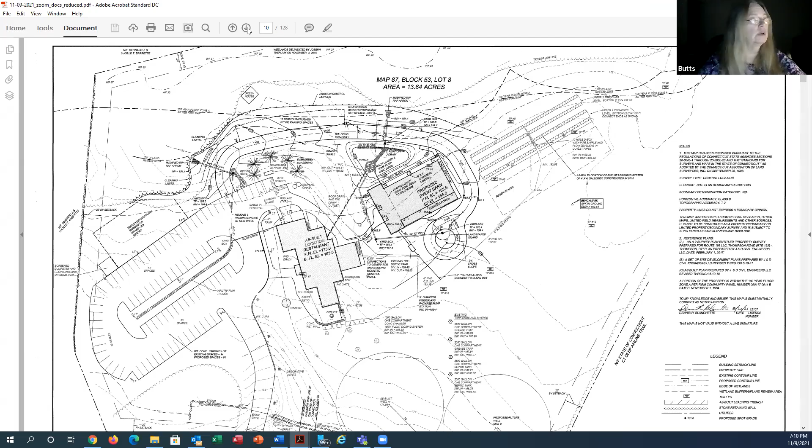Thank you, let's move on to the next item. It's SUB 21027, Inn Acquisition Associates LLC, 286 Thompson Hill Road, Assessors Map 102, Block 40, Lot 2, two-lot subdivision for conceptual approval, stamped received on 9/7/21. Let me just move to that.

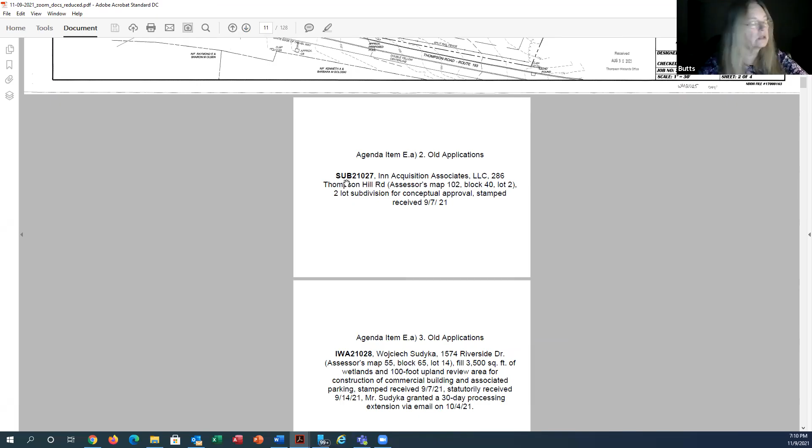Is there anything else, George? Marla Butts speaking. This was inadvertently placed on the agenda. It was on the September agenda, and the commission approved that conceptual subdivision plan, so it was an error placing it on the agenda for this month's meeting. There's no action required by the commission because it has already taken action on it.

Let me move on to the next item here, which is IWA 21028, Wojciech Sudyka, 1574 Riverside Drive, Assessors Map 55, Block 65, Lot 14. Fill 3,500 square feet of wetlands and 100-foot upland review area for construction of commercial building and associated parking. Stamped received on 9/7/21, statutorily received on 9/14/21. Mr. Sudyka granted a 30-day processing extension via email on 10/4/21.

What do we have on this one, Marla? If you go to page 13, it's the email thread wherein I requested Mr. Sudyka give a 30-day extension to the commission.

The reason for this is that I was going to be out of the office for the latter half of September and was not returning until after Columbus Day, which would have been the meeting date. Since the application had been stamped received statutorily on the 14th of September, the timeline for rendering a decision requires action within 65 days of receipt, or to decide to hold a public hearing within that time. Not wanting to compress that timeline and to give the commission, as well as myself, time to review the application, I requested Mr. Sudyka grant the commission a 30-day extension.

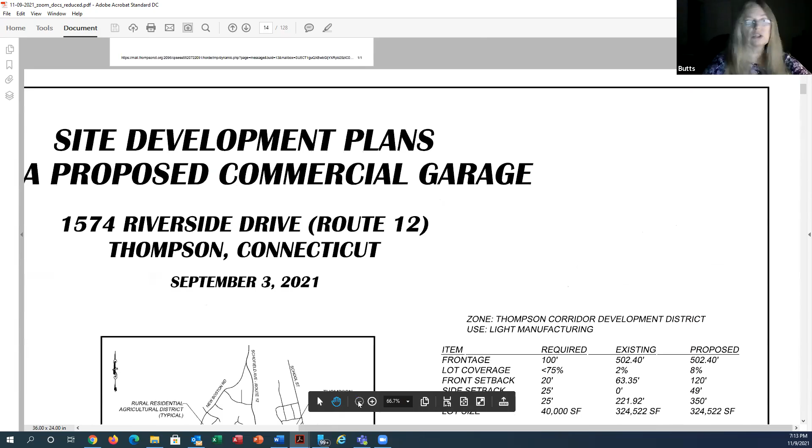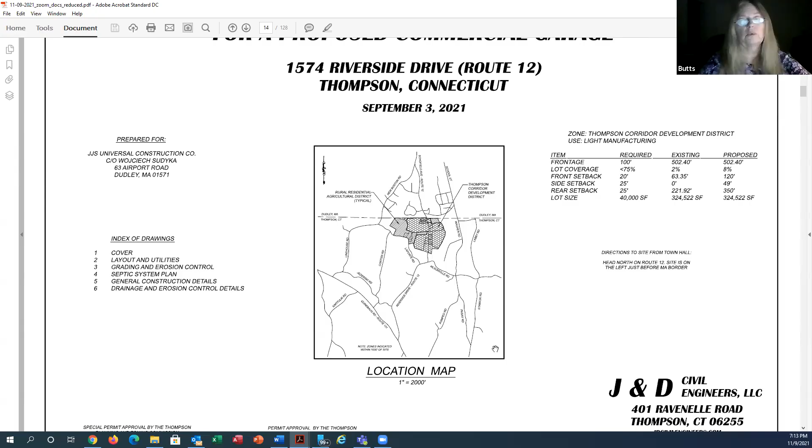Okay, thank you. That leaves us with the application, which can be explained by Daniel Blanchette, who is here and can give you a review of the documents in the application. When he's done with that, I'd like to talk about what I observed on the 18th of October and the implications of that.

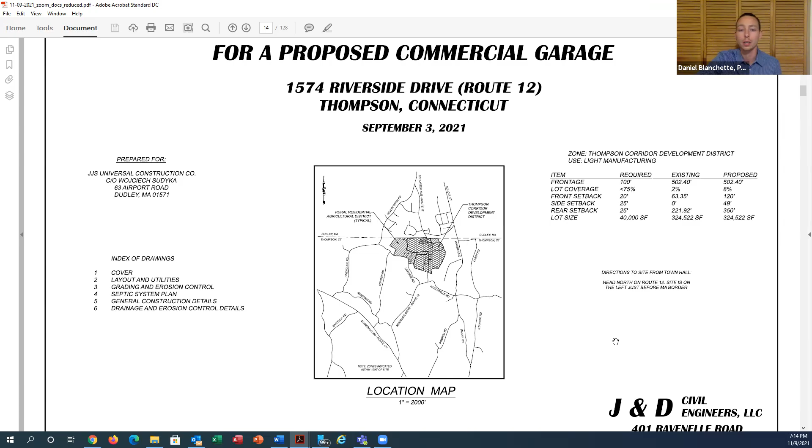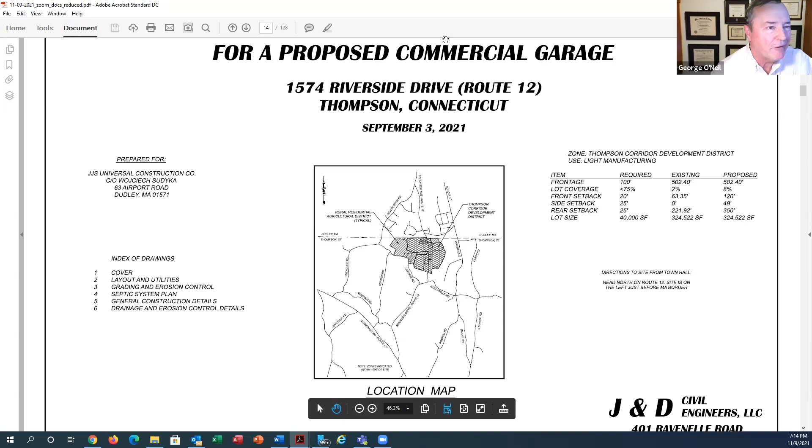If it's possible, I'm going to try and share my screen so I can point out features of interest. Okay, Amy, I guess we'll let Mr. Blanchette share as well. It says another participant is already sharing - oh, I have to release mine. My error, let me stop sharing my desktop. There we go, try that, Mr. Blanchette. Give it another shot. All right, let's share. All right, can everyone see that? You had it for a moment, then it disappeared - can you see it now? Got it, I can see it. Okay, everyone, continue.

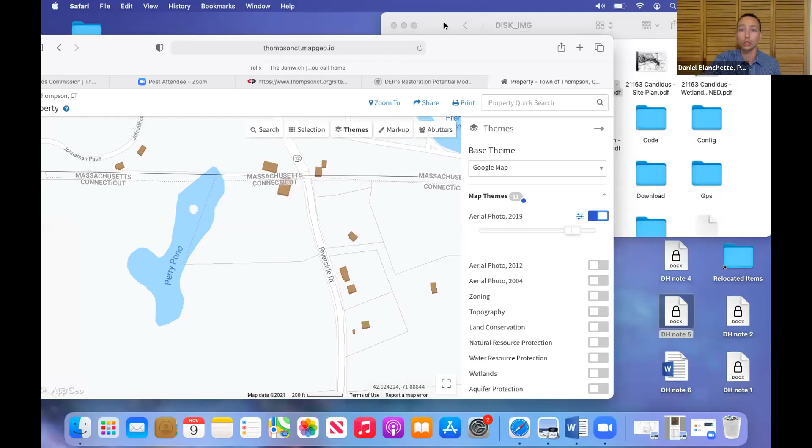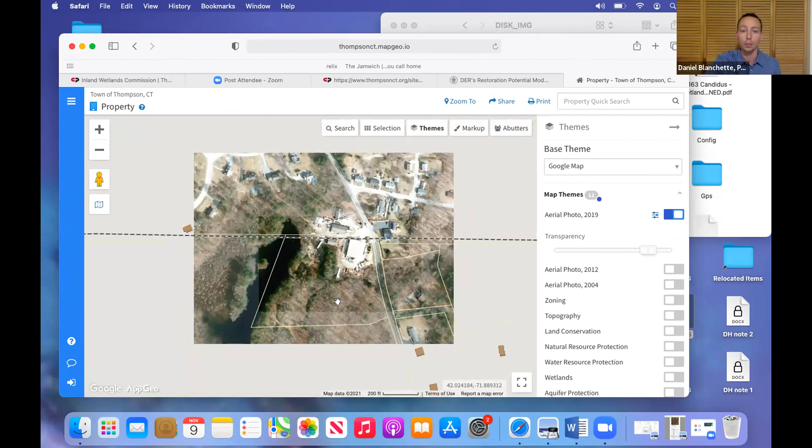As you can see, here's the town of Thompson - I'm just going to zoom in. The site is located right on the west side of Route 12 at the Massachusetts line. There's an existing building at the northeast corner, and my client is trying to expand his business, so he wants to build another commercial or light industrial building. Here on the aerial photographs you can see the building in the northeast corner, some parking and storage, and basically what my client is proposing is to build another building to the south.

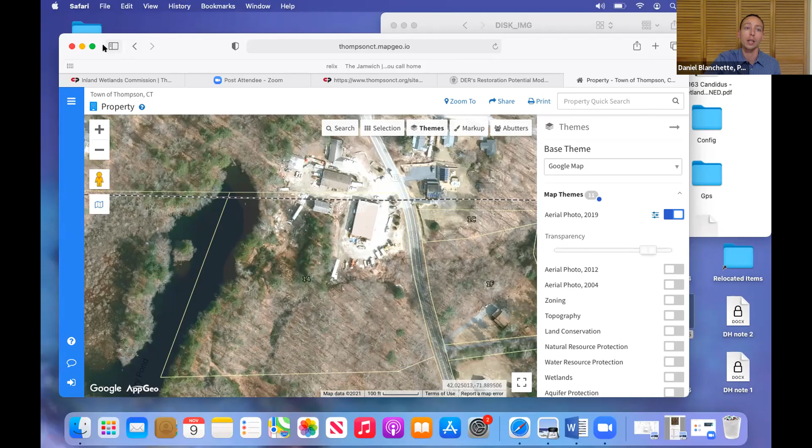That way he can store some of these vehicles and building supplies that he needs. As everyone saw on the site walk, this is a pretty challenging site. What's very unusual is that there's a dam and a pond at the highest point of the site, so all our proposed construction is down here, below the pond level, and there are several different pockets of wetlands we've had to work around.

Now let me go to my site plan here. All right, excellent. So here's, again, the site plan. Here's the cover sheet, it shows the zone and the location.

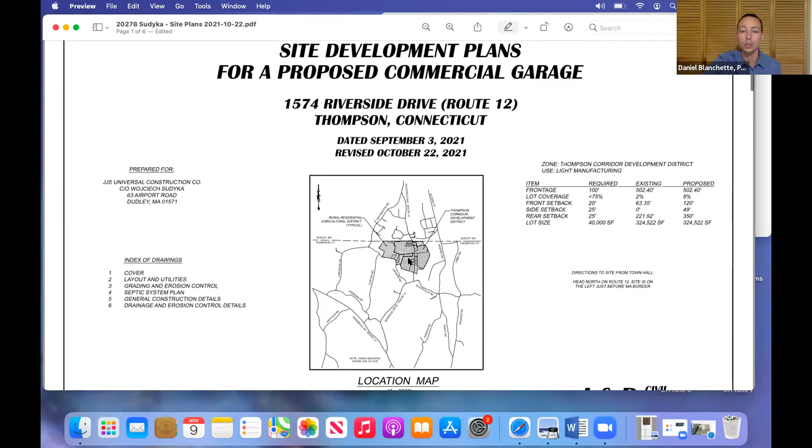Okay, now scrolling down to sheet number 2. Again, here you can see the existing building at the northeast, and then the proposed building at the southeast. Here's Perry Pond on the west side, and Route 12 coming down the east side.

We did have a soil scientist delineate the wetlands, and the pond has some associated wetlands with it. There's a pocket of wetlands at the southeast, another kind of at the middle east, and another that we're proposing to fill with the building and parking lot. There are also proposed wetlands here. So the building is really situated in between all these pockets of wetlands. We tried to minimize any potential wetland disturbance, but unfortunately some was required.

The site's about 7.5 acres in size. We're proposing to disturb about 3,500 square feet of wetlands, basically this entire pocket will be filled in. We had the soil scientist go back and conduct an ecologic evaluation of those wetlands to make sure nothing important would be harmed. He found nothing really crucial, nothing endangered — things like red oak, red maple, cinnamon fern, and dewberry. That report has also been provided along with our application.

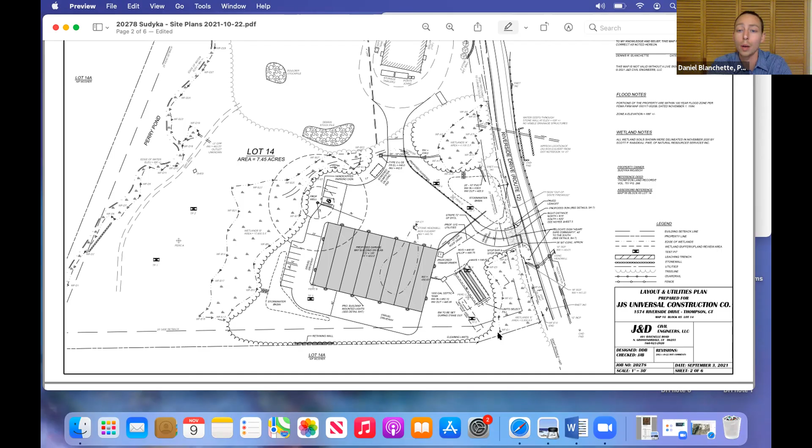We have a pretty detailed drainage system here, a stormwater management system I'll get into. We submitted these plans to DOT for an encroachment permit for the new driveway. DOT reviewed the site plans and the drainage calculations, about a 50-page report, and had very minor comments — they asked for a sign to be relocated and a double yellow line to be marked. They had 4 or 5 comments, but nothing having to do with the drainage system.

Now, let me see if I should scroll. Okay, yeah, so this is a little bit more of a zoomed in picture. Nope, too much. So again, the proposed building is kind of just cut off the site, and the existing building is cut off. Here you can see the proposed building.

There'll be a new driveway coming in off Route 12. This will be a large parking area — there'll be some pretty large vehicles inside here, so we need a lot of room for turning. And then there will be a driveway that connects up north to the existing structure.

There's also some parking on the west-hand side and some parking around and back, because this building is basically a large garage building. You can see it split into 8 separate bays, each with an oversized garage door at either side. This is designed to park potentially very large tractor trailers, semi-trailers, and other construction vehicles, plus a lot of his building supplies, pallets of roofing and siding, things of that nature.

Here you can see there is a well — it's actually not shown on this sheet. There's a well up here to the northwest of the building, and a septic system down here.

Unfortunately, I do not have a septic system approval from NDDH. The plans were submitted in late August. I spoke with Maureen Marcoux about 3 weeks ago, and she said she had received it. We talked briefly about the number of employees that would be using the site, but unfortunately I have not heard back from NDDH.

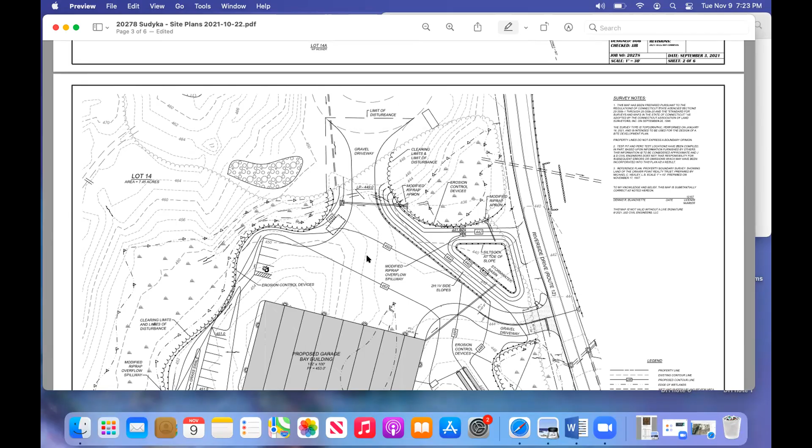Absolutely. As I mentioned before, this stormwater system was designed with low impact development principles. There's no peak increase in runoff. So again, we're not generating more total runoff from the site because of these methods of capturing and infiltrating the groundwater. There's also a standard that's called...

Basically, you have to remove a certain amount of solids from dirty stormwater. So again, parking lot stormwater coming from the parking lot is potentially polluted with salt, with sand, with maybe some kind of oil or chemicals, as you said. And so we have treatment, again, which has been designed according to the state manual to treat that runoff before it enters the wetlands. Again, we have grass swales and infiltration basins here.

And we also have a large infiltration basin here. And those are sized to capture the first inch of rainfall. People have found that the first inch of rainfall is the most polluted -- that's what would capture anything. And so again, for 1 inch of rainfall, all of our stormwater would be properly treated. None of it would flow directly into the wetlands. Thank you.

I do have a question, George O'Neill speaking. What consideration was given to riparian buffers? I noted that where your proposed drive is, it really traverses that existing intermittent flow in wetlands, and it seems like you're parsing the wetlands with a pipe, so that's certainly a concern. Then I'm also concerned about perched culverts that inhibit the transit of aquatic and other related life. So maybe you could speak to that subject.

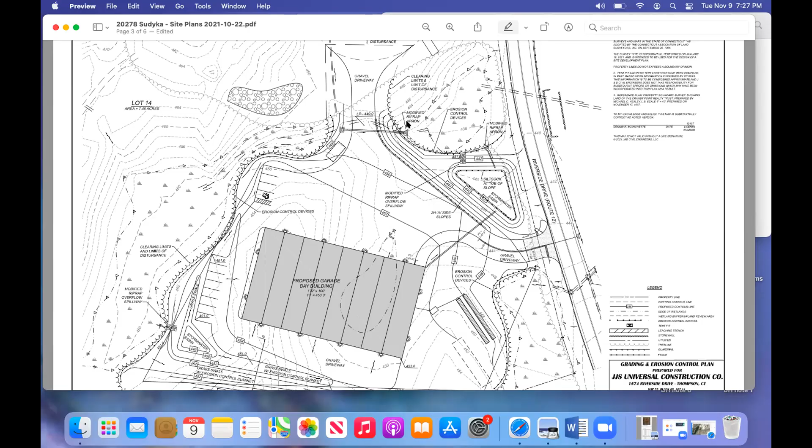Chairman O'Neill: Yes, Dan, could you tell me the size of the proposed pipe across that driveway area? Mr. Blanchette: Yep, again, this was all modeled in our drainage software, and this pipe has been sized to handle the necessary flow. Just going to zoom back up here and see -- how big is it? A 15-inch corrugated plastic pipe. Okay, thank you.

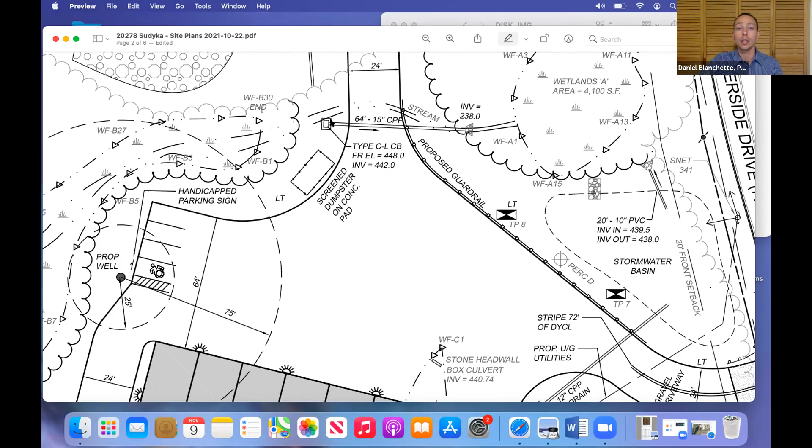So what is the invert for that catch basin in relation to the ground located to the west of it? Absolutely. If you go one sheet up, you'll see that the frame elevation is specified as 448. Once water reaches that elevation, it's going to enter the catch basin and cross the stream. Scrolling back down, the existing ground at that elevation is about 444.

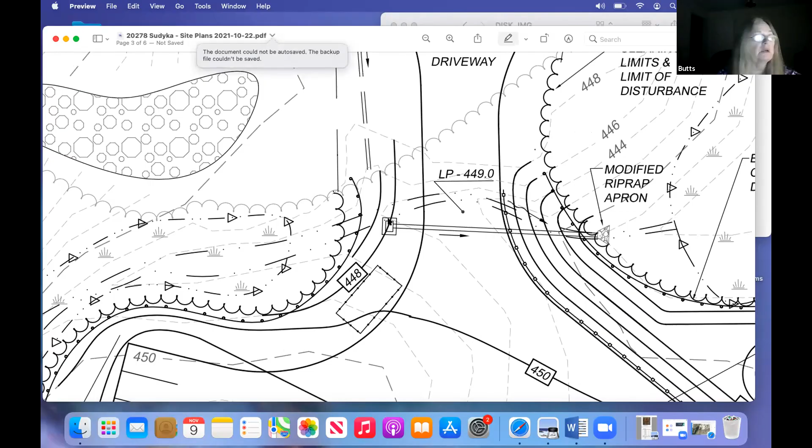So we're raising up about 4 feet here. We're making a little embankment to grab that water. So you're expecting there to be water impounded behind that catch basin, correct? Yep, that'll act as a bit of a dam and provide more storage here before it spills over. Okay, so there currently isn't any pooling of water at that location, correct?

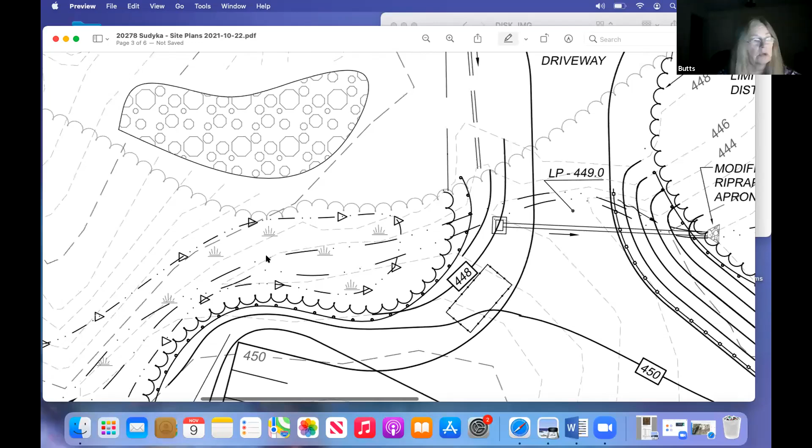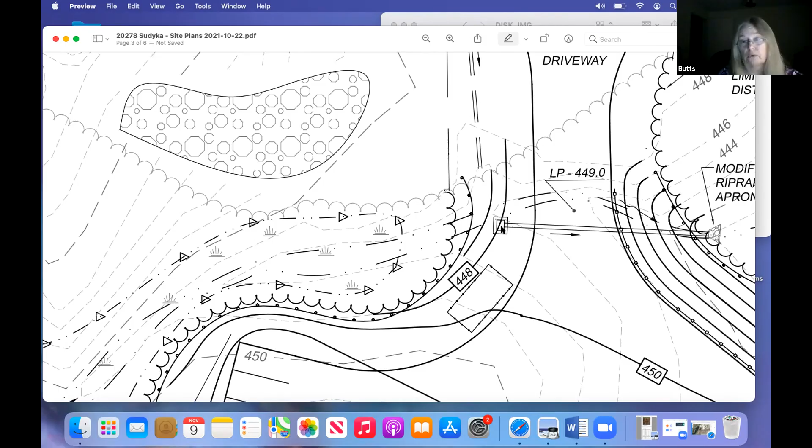At which location? At the stream here or at the wetlands? The catch basin, just west of the catch basin. Yep, because the catch basin is going to raise the water pooling capability to about 4 feet in depth. So my question is how are you anticipating there to be standing water there during high flow times or during times of high runoff?

Yes, correct. Okay, what about during low flow times? Do you expect it to be stagnant? I don't expect it to be infiltrating into the ground for the most part. I don't believe there's a lot of standing water here at the moment. There's probably a little bit, but it's been a very wet summer, and there's not an obvious pond or huge amount of water sitting here currently.

So the top of grade of that catch basin, what is the top elevation for the road at that location? How much freeboard do you have before it could potentially overtop? We have 1 foot, as recommended by the manuals. There's 1 foot of freeboard there.

So in a very heavy rainstorm, is it possible that your driveway will overtop? It's possible, yep, it is possible. That was designed with a low point basically right above the pipe. So during a very high rainfall event, if water is overtopping or can't be handled by the catch basin, it would spill over right here, which is below any of the buildings.

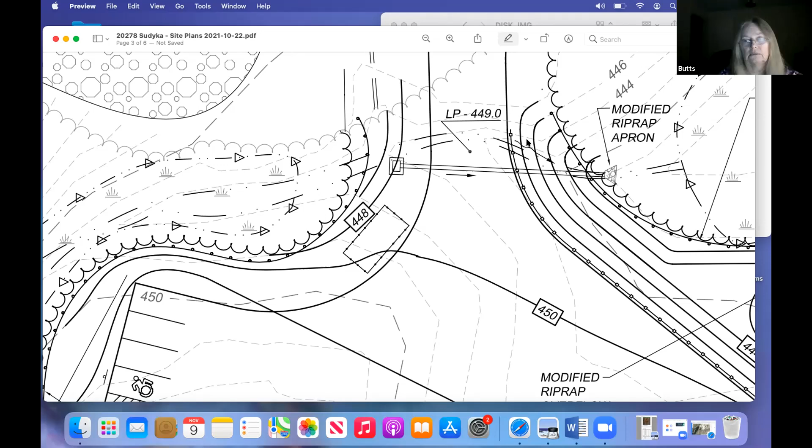So this is a gravel drive, is it not? Correct, yep. So overtopping a gravel drive could cause that gravel drive to be eroded? Yes.

Then also, there is a double dash dotted line located to the north of that catch basin. Yep. Explain what that is. I believe this is the primary outfall for the Perry Pond Dam. If I can scroll back up, the Perry Pond Dam is pretty unusual. Water spills over here, down into the wetlands, before heading east. I believe the primary outlet is up here somewhere, where water is bleeding through under the dam, but also there's some kind of primary outlet directed to this catch basin and then down to our little intermittent channel here.

But right now, you do not actually know where that water comes from or flows to, correct? You do not have details on that storm drainage system. Okay, I did not see the outfall to that pipe that you show on the plans when I went out in the field, and I don't believe the commission saw it either, according to their minutes. Now, I'm not talking about that one.

I'm talking about the one next to the driveway catch basin, just north of the catch basin, that one. I could not find that outfall. I don't recall seeing it. You and I saw that when we walked the site together, Marla. You and I saw that, and it was flowing with a little bit of water. Then we came up to the catch basin, and again, we could see water flowing through that as well.

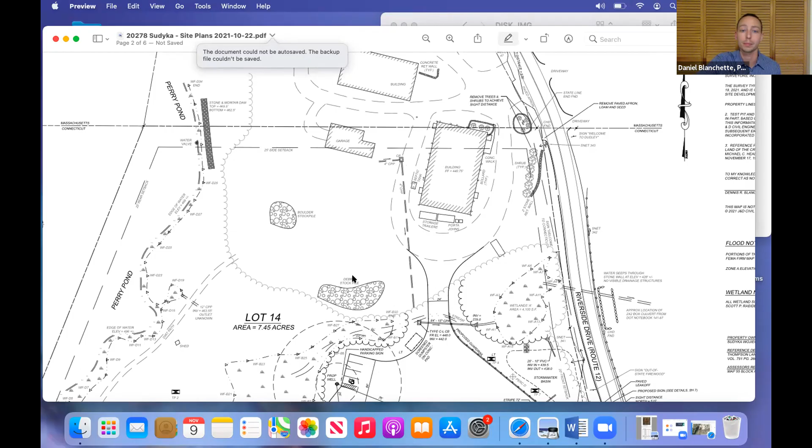My next question is for Daniel: did you incorporate the drainage from that pipe into your hydraulics? No, we didn't. It's our opinion that the dam is a separate issue. Whatever water is coming off that dam is not going to be affected by the proposed construction. This is all downstream of the dam, and we're not increasing any peak runoff from the site. Whether 1 cubic foot or 100 cubic feet comes through this pipe, that's a separate issue—none of this work is going to impact the dam.

I'm not worried about impact onto the dam. I'm worried about the capacity of that cross culvert underneath the proposed gravel drive, and whether it's capable of handling flows it might receive from Perry Pond runoff or drainage, since that's not included in your hydraulic analysis. Nowhere in your hydraulic analysis have you identified or referenced the dam at all.

During the site walk I performed on October 18th, notes of which are in the Zoom meeting documents, I saw runoff—water flowing from 3 different locations that appeared to be generated from Perry Pond. The first being what you identified as the 12-inch CPP near the shed, the southernmost outfall that I saw.

I also saw water flowing from the toe of the masonry and mortar dam, draining toward an area a little to the north, which had a have-a-heart trap over a small plastic pipe.

That small plastic pipe, located in Massachusetts, was also receiving water from the toe of the earthen embankment of Perry Pond, also in Massachusetts. So that small pipe, which I believe is the one you're referring to that goes down to the catch basin for the gravel drive, is receiving water from 3 different discharges, apparently from Perry Pond: the one near the shed, the one near the masonry and mortar dam, and the one from the toe of the earthen embankment in Massachusetts.

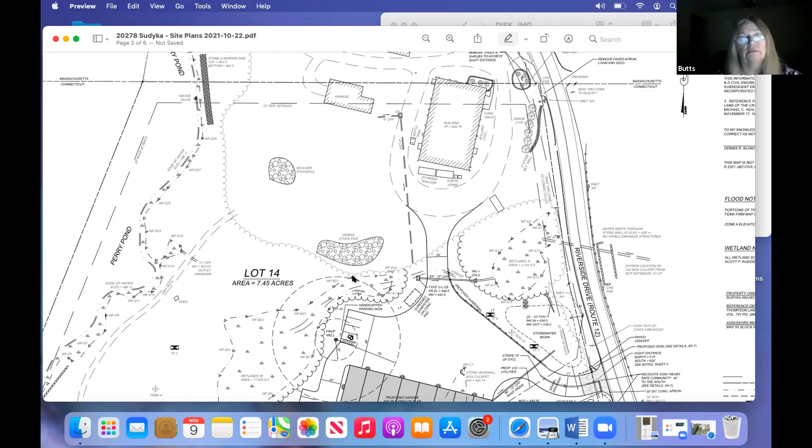So is this dam registered in Connecticut? It's not, but I will show you it's cataloged in Massachusetts.

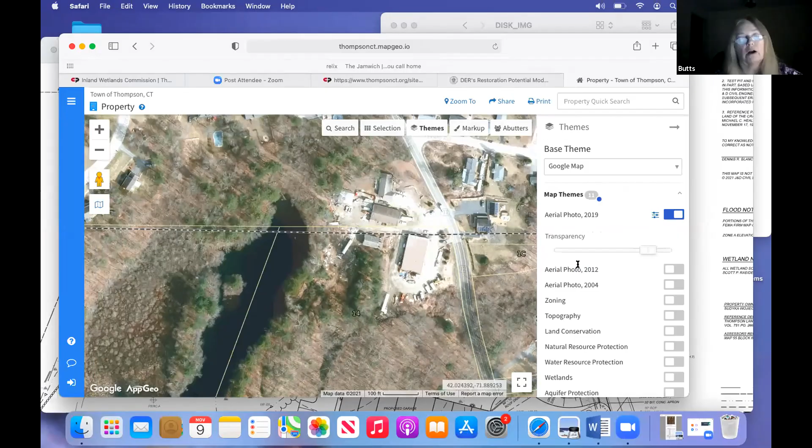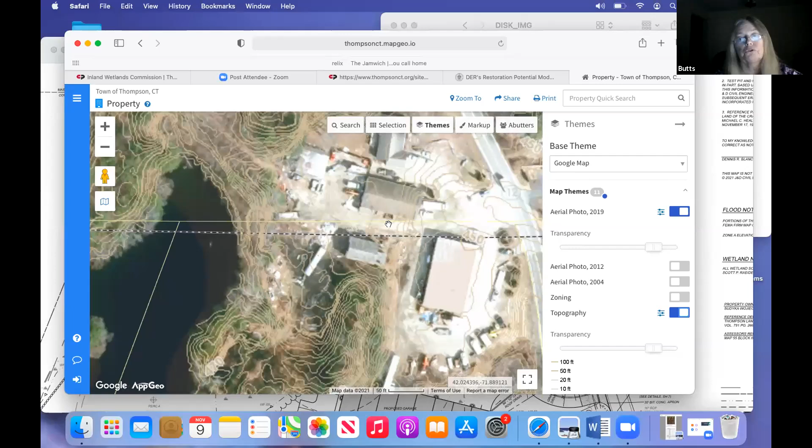If you go back to the map and turn on the topography—this is 2-foot, 2016 LiDAR topography—you can see there's an embankment in Massachusetts that's part of the dam. Looking at the Massachusetts topography, you can scroll out a bit and see the topography as it heads north.

That looks like there could have been some sort of drainage heading north, but there's no evidence of overland flow when you turn the aerial photography on—that area is already a subdivision now.

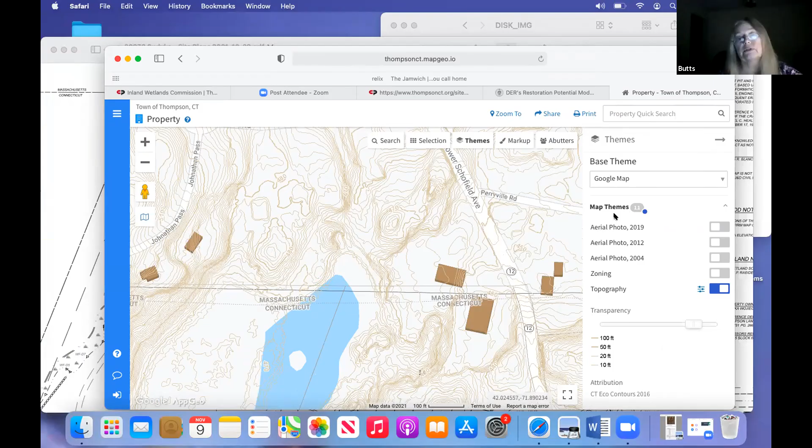Massachusetts Dam Safety may have identified it as registered there without any potential impact, since that part is in Massachusetts. But looking at the site, there's a low area at the toe of that embankment that drains toward Connecticut. Any overland flow or breaching of that dam would likely flow into Connecticut, but Connecticut doesn't have it registered, so no hazard classification has been identified for that dam.

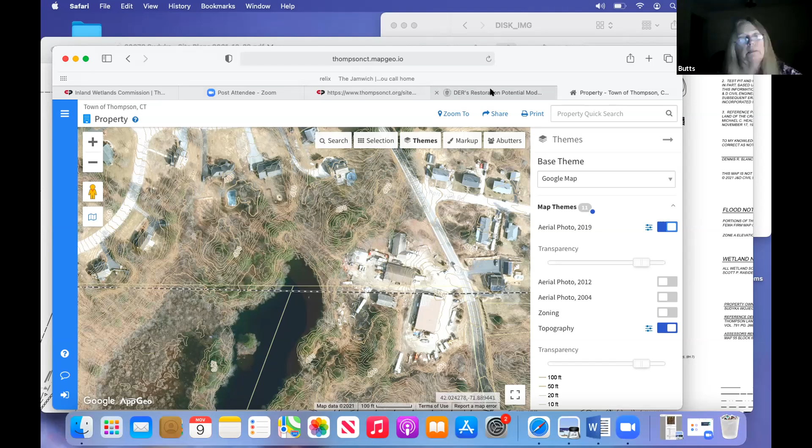That's problematic, because if it were registered with a hazard classification as a Class B or Class BB dam, its condition would be of concern. If DEEP identified it as a Class A dam, they would not regulate it, and there should not be as much concern.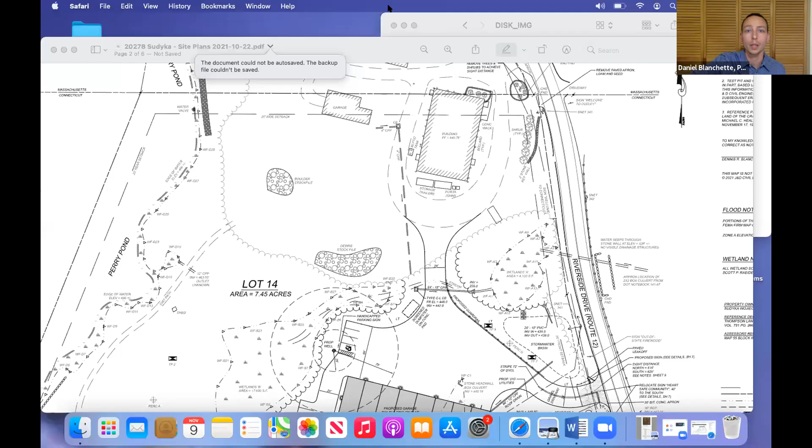If George could scroll down—wait, has he stopped screen sharing? I think Daniel still has it. Yes, Mr. Blanchette does. Let me go back to my screen share, give me a moment, and grab my screen. Please let me know if it doesn't come up.

Do you see it? Yep. Okay, go to page 94. 94, okay, hold on, yeah.

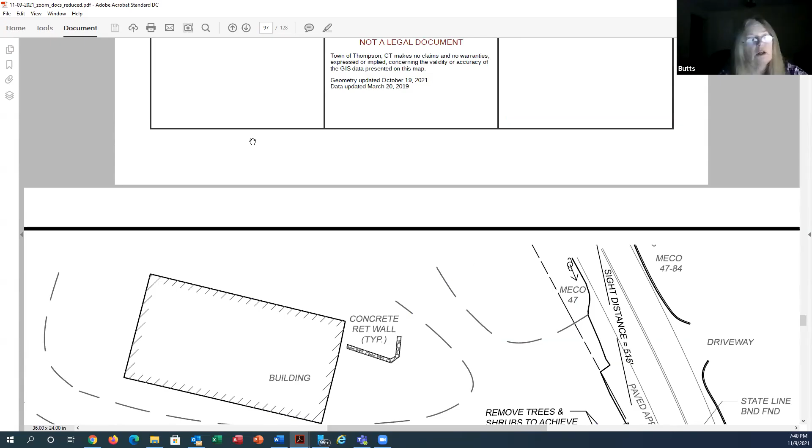Those are the recommendations that I gave to the Inland Wetlands Commission to do a site walk based upon my inspection of October 18th. Attached to that were some documents and diagrams, but also I attached the StreamStats report from Perry Pond, using the USGS StreamStats program. The interesting part is that it identified the outfall to Perry Pond heading north into Massachusetts, but that is not verified by aerial photography, because there is no indication of water flow or stream flow based on the aerial photo interpretation.

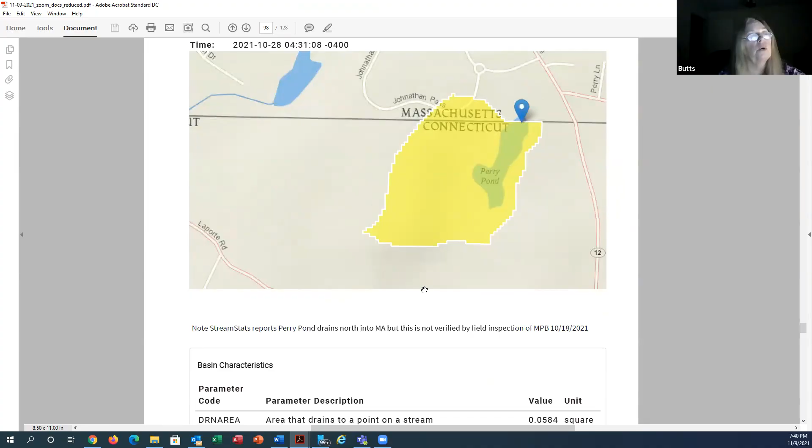I did identify the contributing watershed to Perry Pond, and it is just a little over 37 acres. I don't know how DEP would look at this. There are so many unknowns about this dam as to where its principal outfall is. No one seems to know, does it go north into Massachusetts, or is it heading south through the Sudyka site?

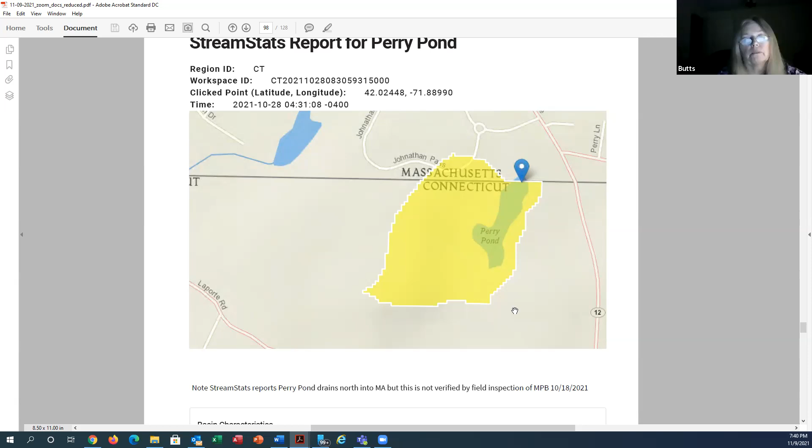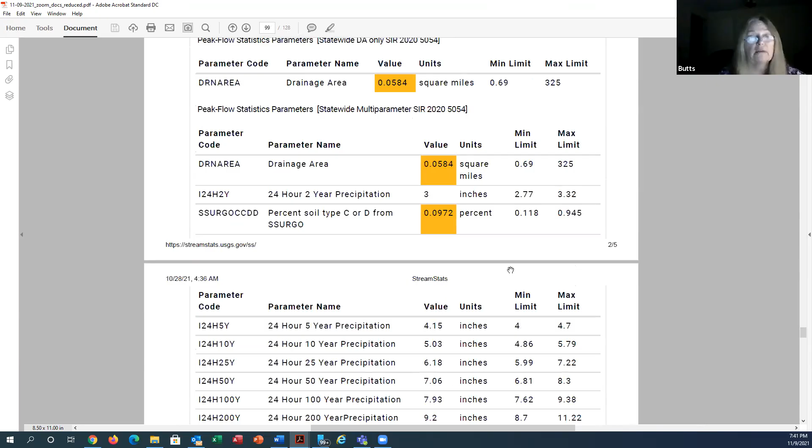These issues are concerning, and I consider this application to be incomplete without an assessment of the function and condition of that dam. Because if the masonry spillway were to fail, or if the embankment near the shed that was referred to before were to overtop during a large storm, what effect would that have on the driveway for the building?

Also, what effect could it have on the DOT Route 12 crossing? I don't believe that DOT, when they did their evaluation, considered the dam and its watershed. I suspect they didn't even realize there was a dam there with the potential for failing into Connecticut. So I will be contacting DOT to let them know of the questions I have regarding the function and status of that dam.

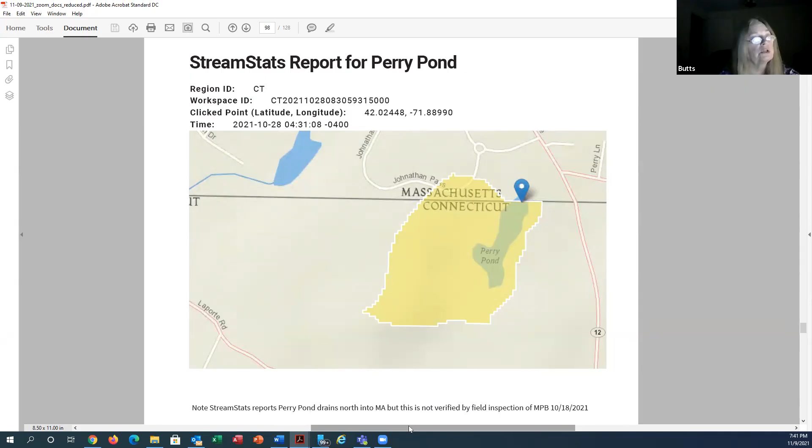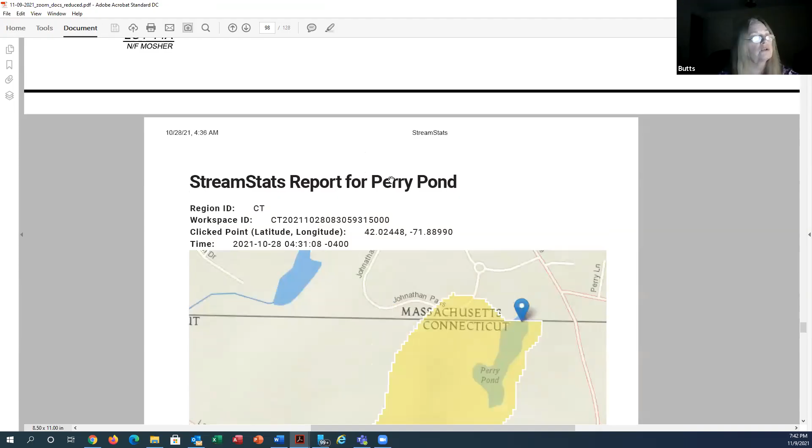What investigations did you do, Daniel, regarding the function and capability of that dam? Were you able to identify an actual outfall in Massachusetts? No, I was not. We did not really do any work in Massachusetts. All our work was on the Connecticut side.

I would like to respond to the comment earlier that the 4-inch pipe was not included in our drainage model, and that was for a couple of reasons. It's not that we forgot it or decided to ignore it, basically we decided it was trivial and almost impossible to model since it's a 4-inch pipe. I've been there many times over the summer. We've had a very wet summer and that pipe was never more than a quarter full, so it appears that even under very wet conditions, there's minimal flow through that 4-inch pipe.

Secondly, with our software, there's no way to really calculate it without knowing a lot more information. It would take a tremendous effort, you'd probably have to go out, dig up those structures, calculate their inverts, calculate their sizes, and there's no simple way to model it. So that's why, in my professional judgment, it was not included in the model.

Point taken. One of the things I did want the commission to know is that when Mr. Sudyka acquired the property, in the recorded deed on volume 791, page 268, there is a boundary map showing ownership extending 75.5 feet into Massachusetts. That would be the extension of Mr. Sudyka's property near the masonry spillway area.

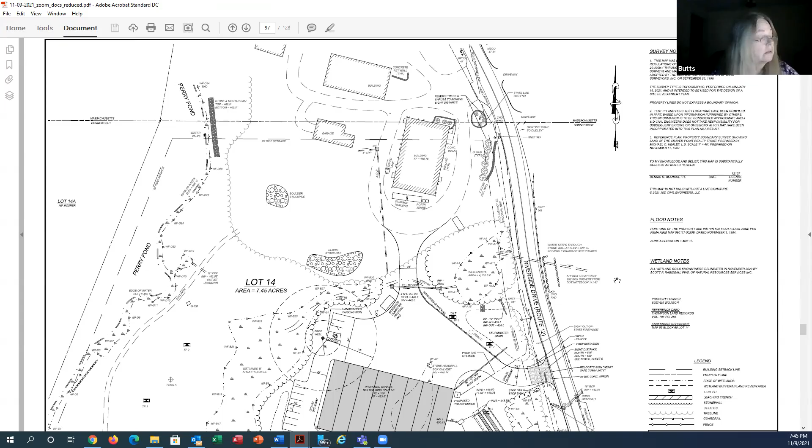The dam is referenced in that deed as being found in volume 2415, page 291 of the Worcester District Registry of Deeds, dated July 7th, 1944. So there's a lot of questions in my mind about the function and capabilities of that dam, and I would encourage the commission not to approve this application until the hazard classification and functional capability of that dam, and its effects on the proposed development, are determined.

Marla: I have a question. Is there a mechanism by which that dam could be inspected and classified?

It's my understanding that there's a state statute requiring it to be registered, and it is not registered. Usually when DEP gets a registration, then it will decide the hazard classification.

Low hazard would mean it wouldn't be a threat to life or property at all, and that's a Class A hazard dam. Class C hazard dams, the highest hazard dams, would cause a loss of life and property, which I don't think this is one of those. But Class B and Class BB hazards are ones that may cause or likely cause a threat to life and or property damage.

How would one go about registering it? The forms are online at DEP's website.

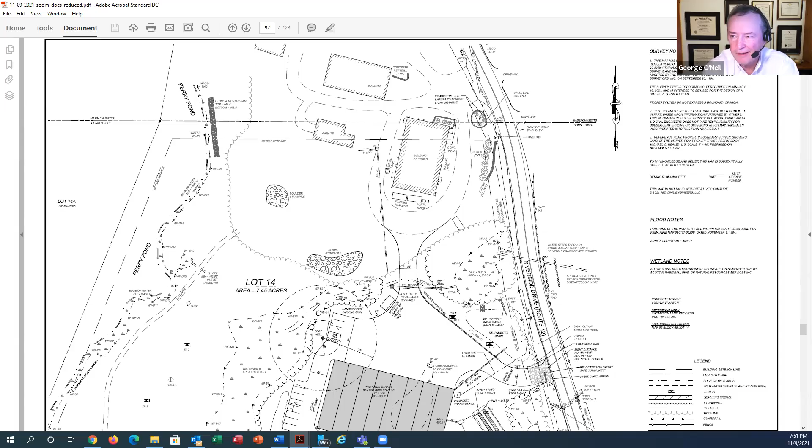Okay, so if I understand your recommendations correctly, consider whether the application can be withdrawn so that the status can be determined, and then resubmit it without a further application fee. That's one choice. The second choice would be, if that's not amenable to the applicant, we go to a public hearing with a complex application fee, which could be $3,000 to $5,000, and we'll go that route.

So, commissioners, do you have any further comments or observations or thoughts here? I think it might be prudent to get more information and determine the status of the dam. Okay, thank you.

Mr. Chairman, this is Janet Blanchett from J&D Civil Engineers. Could I possibly offer a comment? Ms. Blanchett, would you like to comment?

Yes, go ahead, Janet. I can understand Marla's concerns, and she rightly thinks there could be some problems, but dam safety, dam repairs, and dam registration fall under the jurisdiction of DEP. As this commercial project proposed is downstream, it seems like they're kind of separate, independent issues. From the perspective of this applicant, it's really harming his ability to move forward for something that's been in existing conditions for years and years, that hasn't been a concern of DOT, even though the drainage runs toward them.

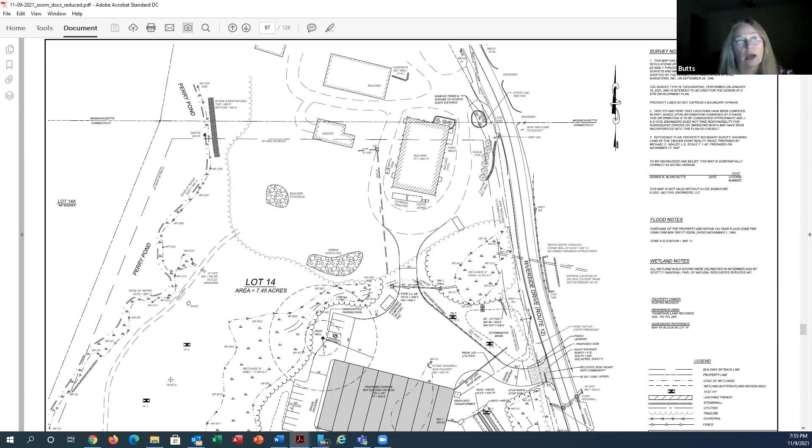Marla, what do you think of this as a third alternative? I think it's a very strong, good alternative to modify the plan, to remove temporarily, at least for now, until the dam situation is determined, the gravel driveway that comes from the main building to the north, so that there is no obstruction at that location. But that would require the submission of a modified plan showing what the grades would be.

You broke up a bit, Marla. I think you got cut off, actually. There's probably bandwidth questions here. Maybe I should come back in a moment.

It sounded like an affirmative. Mr. Blanchett, did you capture the essence of the path Marla was taking on this? I think so, that's when she tunes in. I don't know what happened to Marla, I hope she can dial in.

While we have a second, I'll interject one final thing. There's been some mention of what happens if the dam fails, what happens if the dam collapses, could it wash out this or that. I'd just like to mention it's not typical to use that as a condition when you're sizing pipes.

You don't worry about what happens if the dam fails when you're designing a pipe for a road. If the dam fails, I don't know how badly it's going to fail. Some stuff will probably get damaged, maybe Route 12 will get washed out, maybe my driveway will get washed out. But again, it's not typical to design stormwater systems to handle a dam failure.

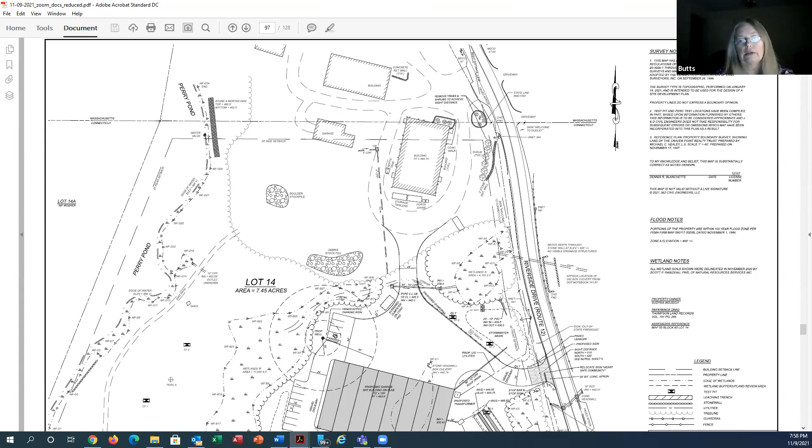My only question is, does he need a turning radius for his vehicles in order to utilize the storage facility? How much does he need in order to make that work for him? Because he's going to need the ability to turn around since he won't have access to the north. They need to identify whether or not that's adequate.

Could I interrupt? Okay, Mr. Sudoku, would you like to be recognized? Yeah, it's Justin here, the son of the landowner. Okay, Mr. Justin Sudoku, you may comment. The idea behind the gravel driveway we're talking about is that a lot of our equipment isn't road legal.

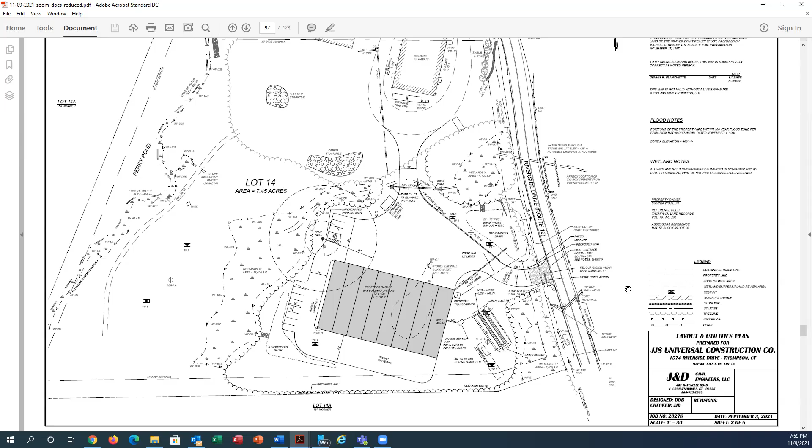Forklifts, excavators — that was the reasoning behind that. It wouldn't be cost effective to move a machine from one building to the other. That was the whole idea behind it. So I just want to make sure — we'll be willing to get rid of that for now, but down the road that is something we'd still be interested in taking care of, to have that driveway there.

Daniel with J&D again. That driveway is pretty important for turning — the biggest trucks are not going to be able to back into the garage without that driveway.

George, another suggestion then. If they included in the hydraulics the 37 acres and runoff from that, and instead of using the small size pipe under the gravel driveway, if they maximized the pipe so it could take the flow should the dam potentially breach with the 37 acres — if they upsize the cross culvert such that it could handle the flows should the dam breach, so it wouldn't cause a backup and washing out of the driveway and whatever other features are there — that might be an alternative.

But that would mean a larger structure, a much larger structure, and a revision of the hydraulics to say, okay, if the dam breached, given the size of the pond, the depth of the pond, and the contributing drainage area, what size structure would you need there? Would you need a small bridge, or what would you need? That would be another way of going around it — is that planned for there to be that kind of flow? That would be in the absence of having an evaluation of the dam's breach analysis.

Mr. Blanchett, do you have any comments on that? Daniel with J&D real quick — I'd just like to say that if the dam fails, there's no way we could design something there to handle that water. I design a stormwater system to handle the 100-year storm, a storm with about a 1% chance of happening. There are things called 500-year storms, but generally we don't size things to handle a 500-year storm. At a certain point, as engineers, we understand that something will get damaged.

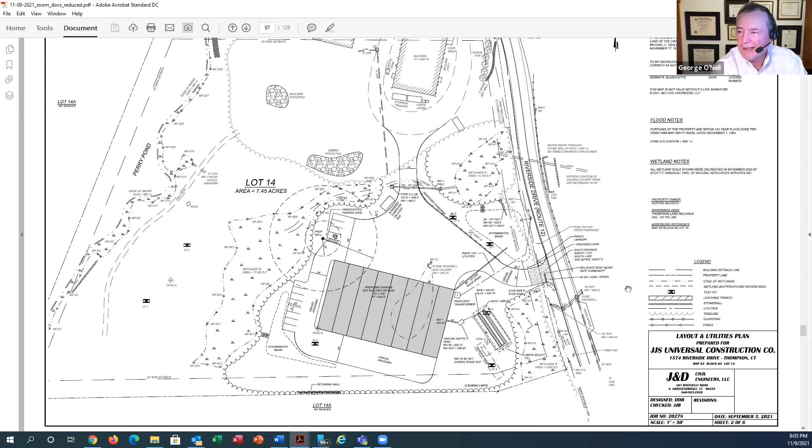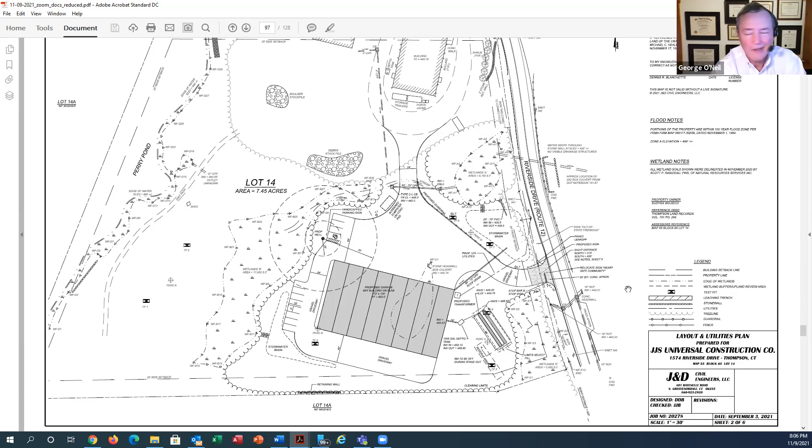What remains to be done during this meeting? Nothing at this point in time. It can be tabled pending the receipt of revised hydraulics and cross culvert design for the gravel driveway. Thank you very much, Mr. Blanchett, Ms. Janet Blanchett, and Mr. Suduka for working with the commission to find a solution, and hopefully this will find a path to advance the whole project. So that concludes this particular item, no further action required.

We can go on to new applications. I'm going to move - George, what? Daniel needs to stop sharing. Oh okay, I'm not sharing. George is. I am, that's me. Sorry, we were sharing - okay, same thing, sorry. I'm on 97, we were back on 6. Was it 15 or something? Yeah, I think we were 15.

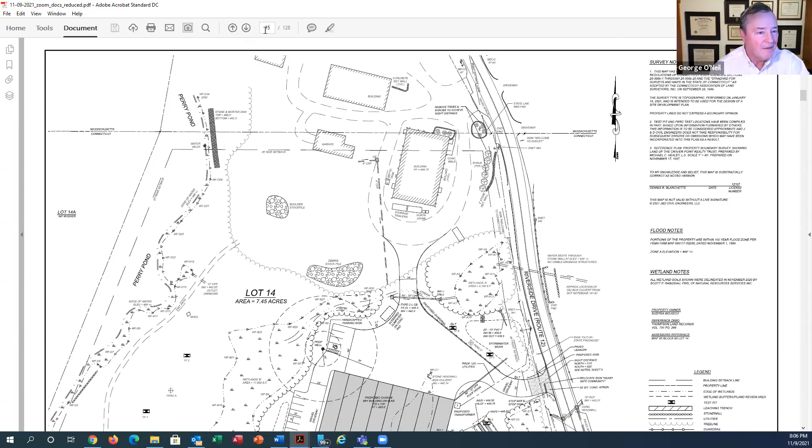103, 103, how do we get from - you want to go to 103? Okay, all right, thank you. Let me just give me a moment while I get my layout correct. All right, new applications, all right.

Thank you very much. Agenda item is new applications DEC 21030, Diane Chapin, 382 Lowell Davis Drive Road, Assessors Map 99, Block 43, Lot 5F. Construct outdoor riding arena in a 100-foot upland review area as agriculture use permitted as of right, received on 11/8/2021. So this is just receiving an application, correct?

She will be using as a base a 6-inch stone compacted layer, with about 2 inches of angular sand on top. The sub base would be compacted prior to the base, which would also be compacted.

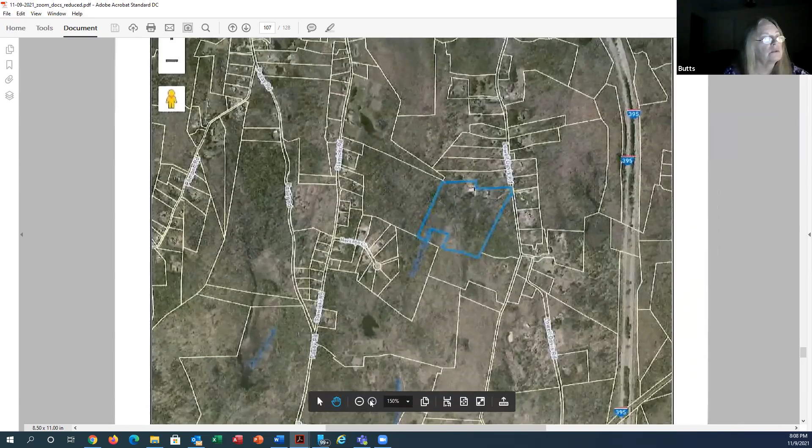If you look at the locus map I put in with her application, you can see where her property is. That's on page 107 of the Zoom documents. She has also provided a drawing showing the location of the disturbed area for the riding arena, on page 108.

Her barn, in the picture you have, is right there in the northern portion of her property. It's the white square. She has identified in red the location of the outdoor arena, and none of it appears to be in wetlands or water courses.

It's all non-wetland soils. Technically, uses permitted as of right are for work in wetlands and water courses. There's no reference to work in the upland review area. The commission currently has regulations that don't distinguish that, so I asked Diane to submit the request for a declaratory ruling.

My opinion would be that this is not a regulated activity because it is covered under agriculture and is not in wetlands and water courses at all, although it does involve some grading and earth moving work. But it is only in the upland review area.

So in your case here, we've got three to vote, so there is a vote required, but no votes required from Diane — she can't vote, she'd recuse herself or abstain. So we've got two. So you just want our opinion? Is that what you're suggesting — that we'd be at liberty to grant it as the wetlands agent, or take no further action?

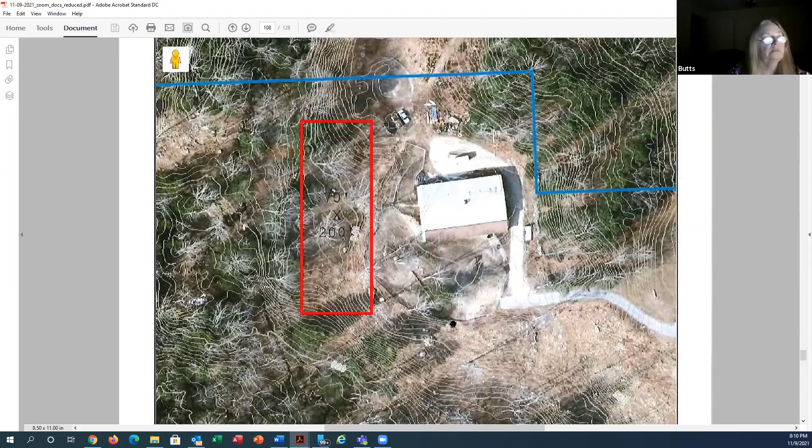So based on the information provided, from my view it appears I would be inclined to concur, but I would be interested in the remaining commissioners' view. Fran? I agree, it seems pretty straightforward.

So the two commissioners at liberty to offer insight have weighed in on the subject. Any additional information, Marla? Nope. Right then, so we can move on.

Let me clarify — so you want me to notify Diane that this is not a regulated activity, and that if it were, it would have been considered a use permitted as of right under agriculture? That's exactly what I was going to suggest, but you did it far more precisely than I would have.

Okay, thank you. All right, moving on to the next item: IWA 21030, Max Candidus, 0 Sunnyside Drive, Assessors Map 133, Block 1, Lot 3. Construct a driveway and septic system for a new single-family home, portions of which are in wetlands and the 100-foot upland review area. Stamped received on 11/3/21, to be statutorily received on 11/9/21.

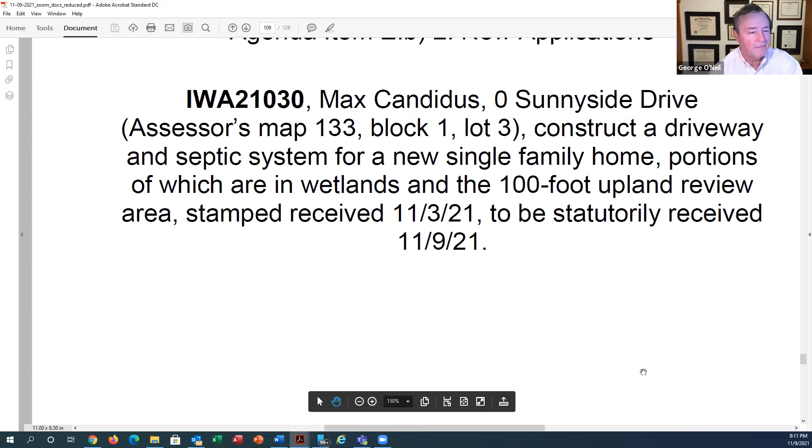What do we have? So for the application, I would suggest you move to page 115, which gives you a locus map of where the site is. Okay, we have that.

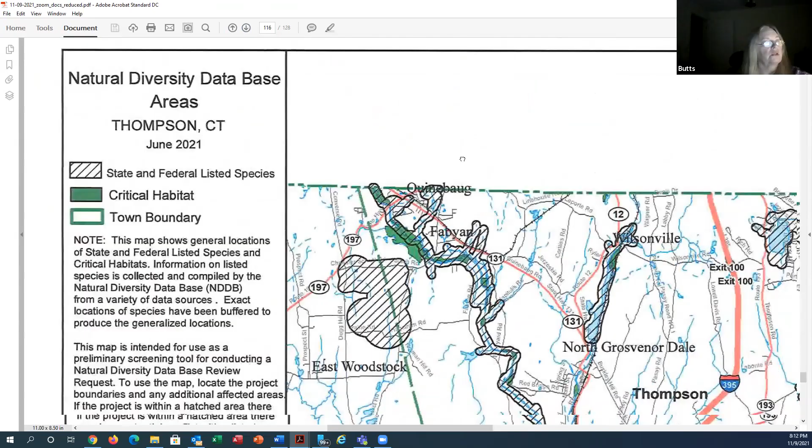So this is near Jerry's Swamp, but it is not in Jerry's Swamp. And if you scroll down to the next page, you will see where all of the hatched areas are for the Natural Diversity Database.

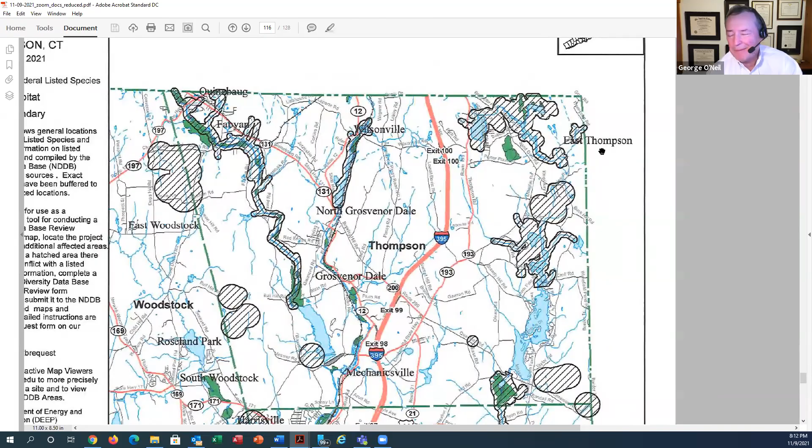It's located in the upper right-hand corner of your screen. No, right hand, not left hand — that's my right hand. East over here, the east side. Oh sorry, left hand then. Yep, over here, your left hand. I'm looking at it on the screen. I was in East Thompson. Maybe your screen's inverted. That's where I was — East Thompson. You can actually see the pond referenced in the application.

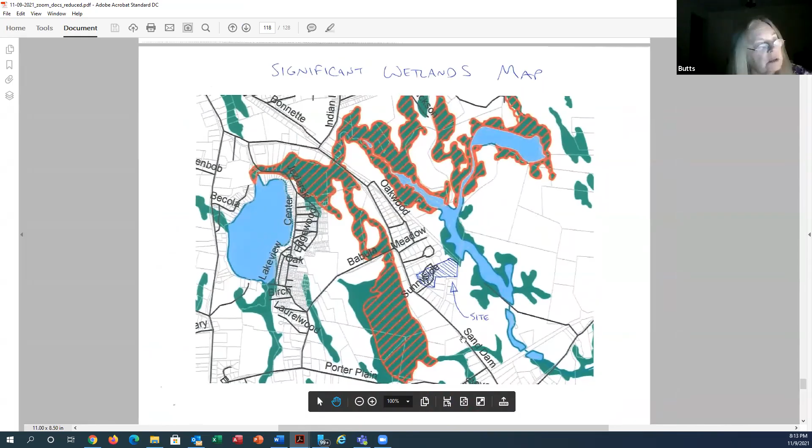It shows as a little bump in the Natural Diversity Database. If you scroll down to page 118, that's an excerpt of a map originally done by Carolyn Werge identifying the significant wetlands. This area has been identified, and you can see the lot crosshatched in blue. It is not located in the significant wetlands area, so its upland review area is 100 feet, not 200, which it would have been if identified in the red hatched green areas, which are the significant wetlands.

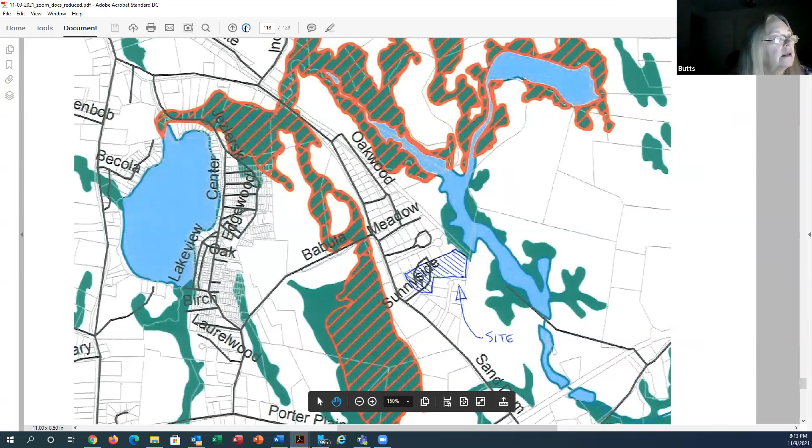Okay. And then you have... I think at this juncture, I don't see the site plans on here. I guess I didn't get them on there. Excuse me everyone, Daniel with J&D again.

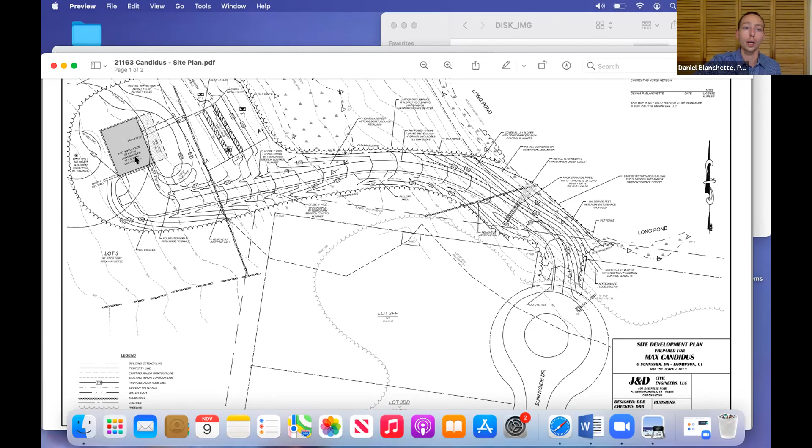So as we were saying, the site is located off Sand Dam Road right here, and it's sandwiched between a noteworthy wetland to the northeast and a noteworthy wetland to the southwest. Here is the site plan, sheet 1. You can see the cul-de-sac for Sunnyside Drive at the bottom right-hand corner. Here's the water body up in the northeast corner, and then we have a driveway that skirts around close to the pond. Right here, we have to disturb a small amount of these wetlands before going up to the house and septic system.

George, just a quick comment on this. There is no other alternative access to this property that I am aware of, other than going through Sunnyside Drive. Correct me if I'm wrong, Daniel. That's correct. This is a lot of record, an existing property, undeveloped lot, and there are no other alternatives that could be identified when the application came in. But because there's actual work in wetlands, some minor filling in wetlands, it requires an individual permit and therefore can only be received at this time.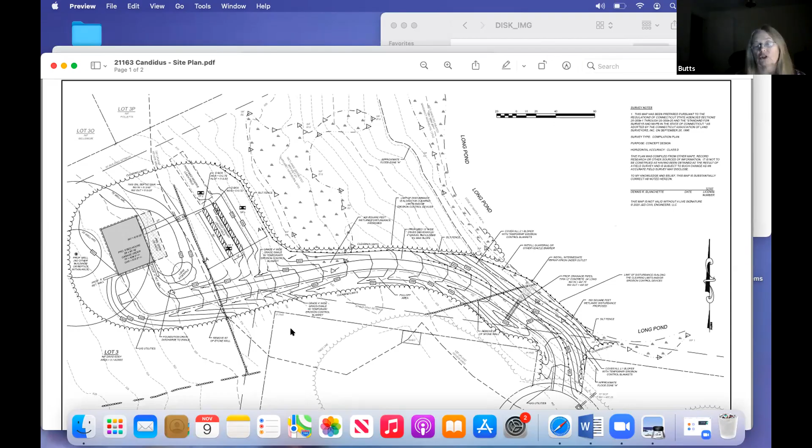Between now and the next meeting, I'll take us and do a site visit to see what kinds of conditions we have for the wetlands and for the storm drain outfall, that's the cross culvert on the driveway. All right then, I guess there's nothing else for us to do at this point, is there? Just other than you looking at it and reporting back. Correct. It'll be considered at next month's meeting.